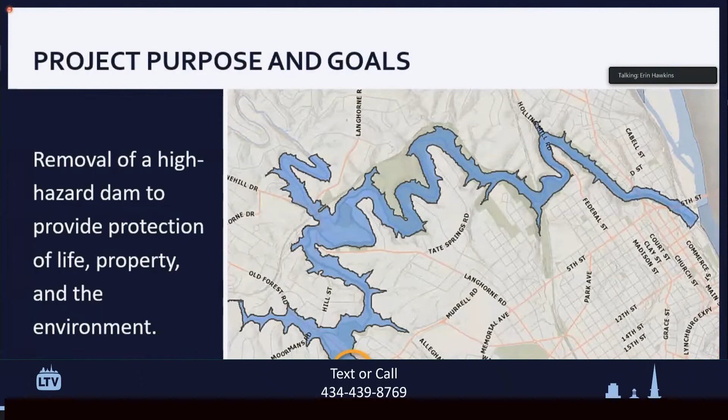So again, just to reiterate, some of the goals that we had mutually with the university: removing the dam on Blackwater Creek, managing that historical amount of sediment that is behind the dam, and then also using the remaining funding that we have to restore Blackwater Creek, what used to be a creek through this corridor, and trying to also create a wetland opportunity on either side of what this floodplain is going to be.

Wetlands are very critical to stream ecosystems, able to help provide habitat, provide ecodiversity, and also help with some of those overbank floods that we'll have through this area, since this is an area within the floodplain.

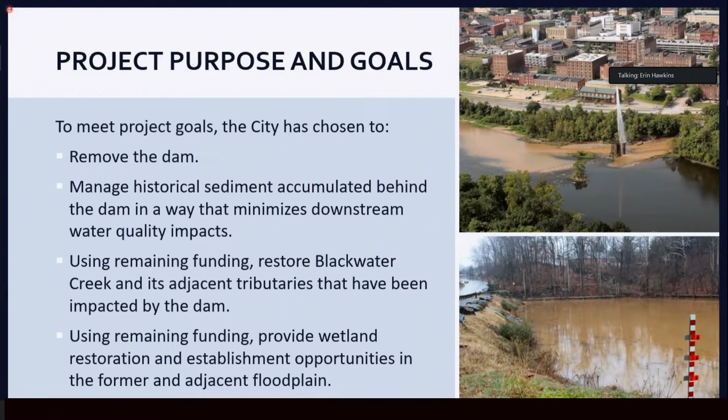So going over some of the work that's been completed so far, there really has been a considerable amount of work completed to date. This has included a historic evaluation of all the documentation that we've had on this project. As Tim mentioned before, this has been a highly studied lake and will continue to hopefully be an area of interest and study for years to come as this changes from a lake system back to a riverine area.

We have done a detailed topographic survey of the project area, including detailed wetland delineations. So these are those areas along our creeks that have those wet characteristics along the whole project area.

We've done a significant amount of geotechnical and seismic refraction work to understand the inner workings of the dam itself, including the bedrock conditions, laying the foundation for this project to come to life.

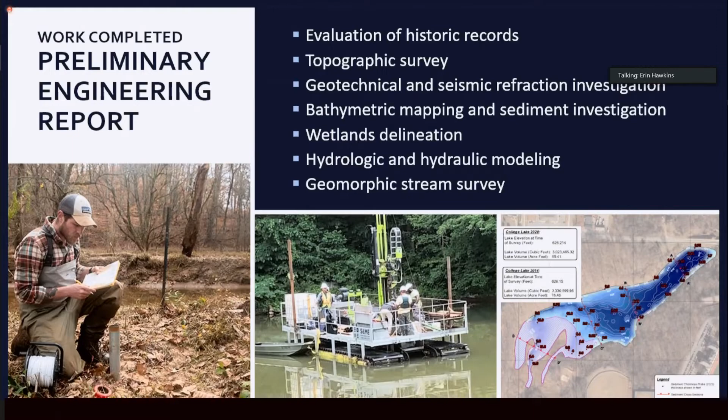One of the things we really wanted to take advantage of is looking at what the future could hold. Once construction is complete and this area has had time to stabilize and reestablish itself as a riverine system, there's a tremendous opportunity for recreational and educational opportunities. We've worked closely with our partner departments, community development, and parks and recreation.

We've also worked closely with the University of Lynchburg and Lynchburg City Schools, particularly the science administrators, to understand what needs there could be for local school children to maybe one day come out to this as an outdoor opportunity right in their own backyard.

Looking at future trails, trail extensions, educational signage and opportunities was really important for us at this point, so we can work through our permitting process and account for these future amenities now, so they're not a roadblock later when we want to make trail improvements to this restored area. This master plan can be used as funding is identified in the future for implementation—a very exciting opportunity that could come out of this process.

So I want to go over quickly a few of the existing conditions before we dive into the real heart of what we're here to talk about tonight, because this lake and this watershed posed a certain set of challenges for us to be able to get to this point of the design.

College Lake watershed has a fairly significant contributing drainage area, about 22 square miles, over 14,000 acres that drain down to College Lake. The outline on screen shows that watershed, reaching almost down to and including a portion of the airport on the southern end of the city near 29. It extends all the way over towards Tomahawk Creek, towards Enterprise Drive, and along the 460 corridor near Liberty University. So there's a fairly significant area that drains down to this lake.

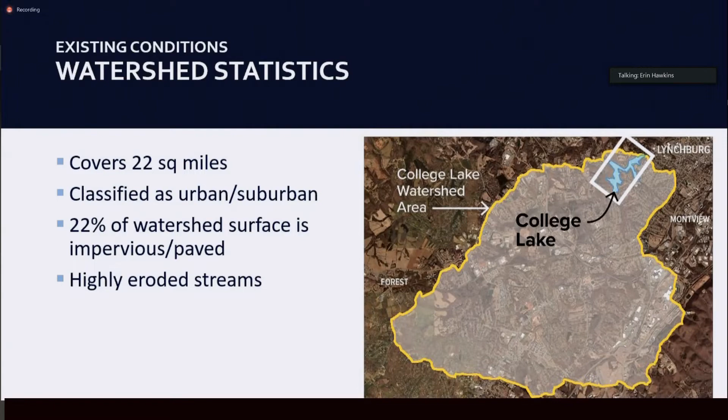What you'll see here on the screen is the lake area, shown as the previous extent of the lake. As we get ready to look at this, we can see the changes that this lake has gone through over time.

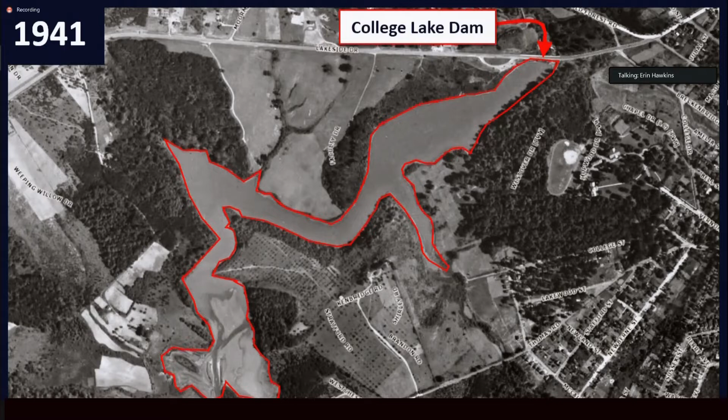This is aerial imagery that we have available, showing the historic extent of the lake. As Tim mentioned before, when the lake was initially built, it covered approximately 44 acres of surface area. This picture was taken in the early 1940s, not even a decade after the construction of the lake itself.

This is an aerial image from 2019 imagery that the city has, and what we have outlined in red is some of that historic extent. From that 1941 image to the 2019 image, and even more recent ones, you can see the intrusion of sediment into the area, and you can see how that lake area has really been reclaimed by a forested area. Within that, it poses a certain amount of challenges, and we'll go through those here really quickly.

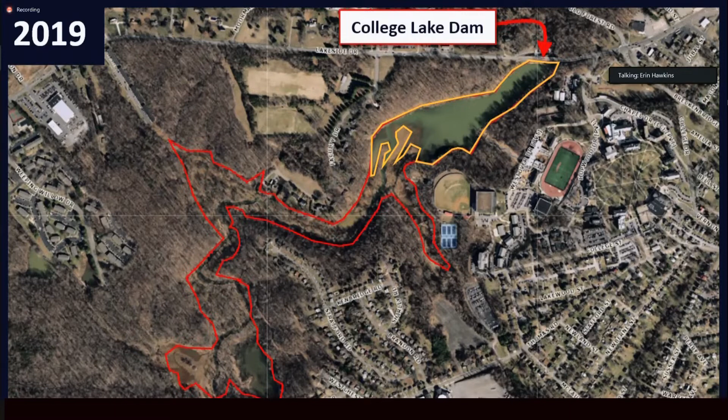College Lake Dam is what impounds College Lake. It is an earthen dam, as Tim mentioned. The spillway at Lakeside Drive Bridge, as it is today—if you can imagine what it would be built today—the spillway would essentially need to be at least the full length of the dam, just to be able to pass that probable maximum flood, or that 10,000-year storm event that was mentioned before. So really looking at that structure, where it was situated, and the bedrock situation was very critical in determining a stream alignment through this area.

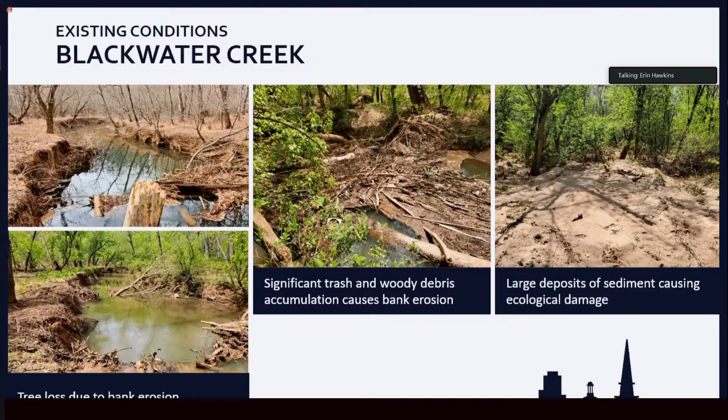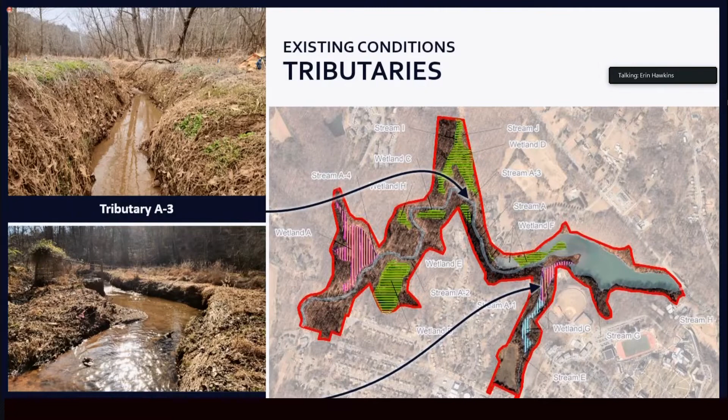I wanted to show you where those tributaries are in relation to the project area. Next slide please. These are two other smaller tributaries that mostly drain the university itself within the project area, so being able to address and account for that drainage into the project area will be important as we move forward.

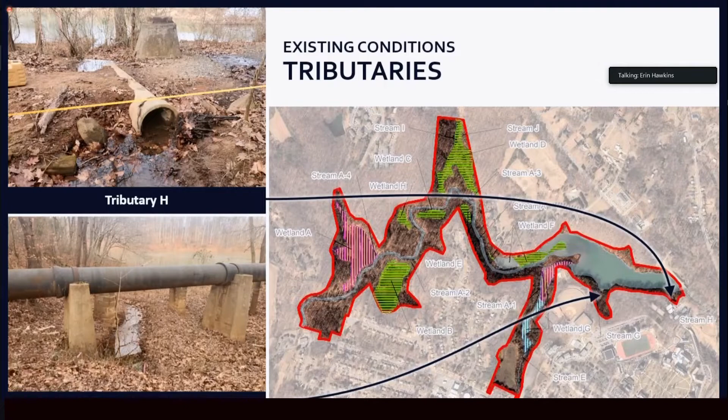Next slide please. Now I'll turn it over to Troy Naperala with AECOM to go through the proposed conditions and construction considerations. Yeah, thanks Erin.

So my name is Troy Naperala. I'm a senior technical advisor with the project, and I've been involved on a fair number of these types of projects across the country. So I'm really happy to be here today to talk to you about this project.

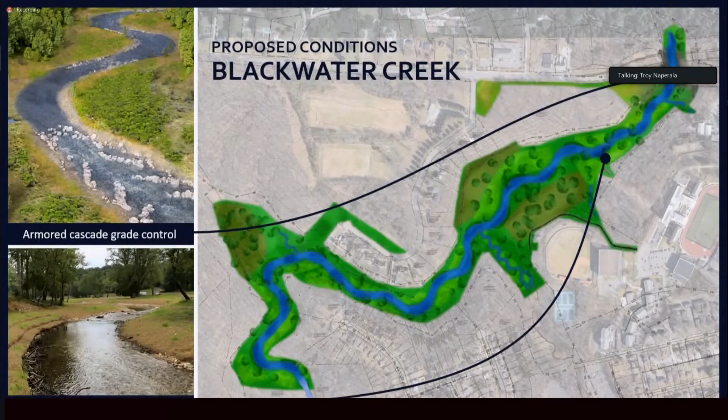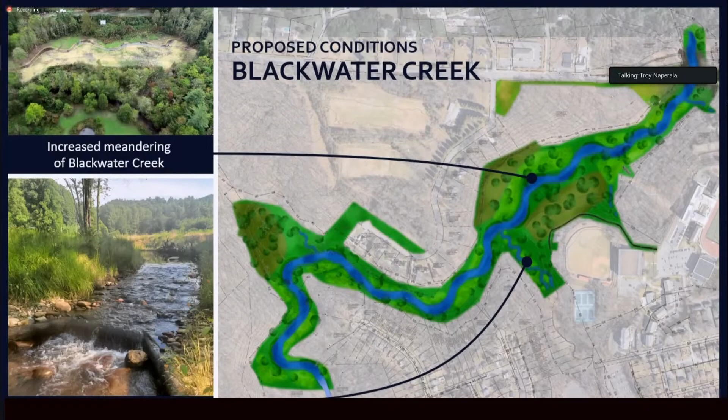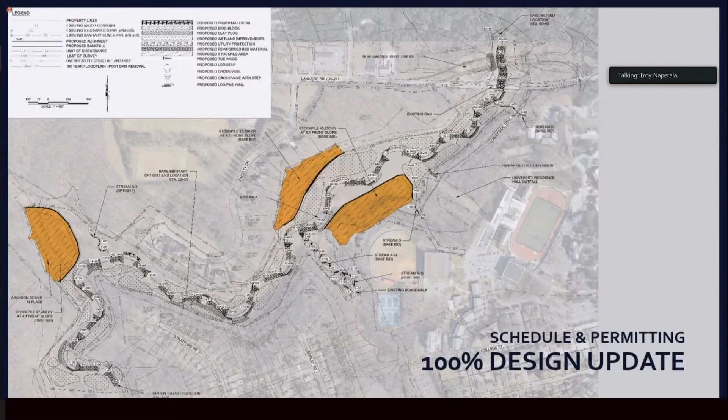To reduce costs and get that material out of the stream so it doesn't flow down as we remove the dam, we've identified 3 storage areas that will be permanent locations where this material will be removed. These 3 locations have sufficient capacity to hold all of the sediment we'll have to manage as part of this process. It's outside of the floodplain, and it'll be contoured into the natural topography of the area, then planted with natural vegetation. Go on to the next slide.

When you get to construction, it's a big site with a lot of activity going on, so there will be a fair amount of signage. This is really to protect the public and keep them out of the way of the construction crew. During construction, the Creekside Trail will be closed from Lakeside Drive to Shirley Road. This signage will be up for the duration of the project, and we'll do this in close coordination with Parks and Recreation and the University of Lynchburg.

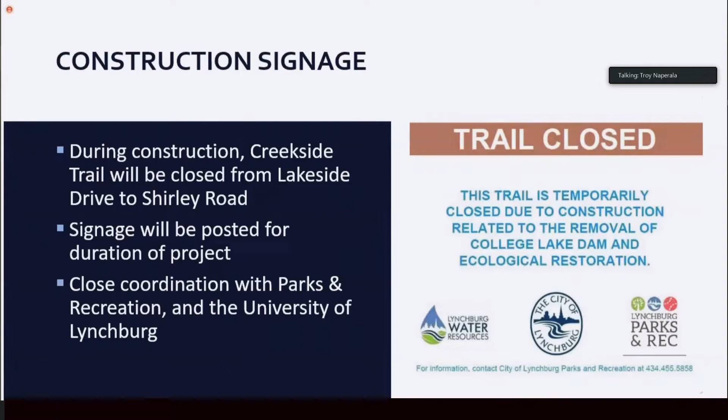We have to manage the water, take care of the dewatering process as we lower the dam. For this particular project, we've selected to use siphons to aid in the management of that water. We've used siphons on a number of projects - they're a very useful tool available to us for a couple of reasons. One, it gives the contractor a lot of control over how much water we're moving from the impoundment downstream, which helps as they move equipment around and remove sediment and dispose of it on site. It's also helpful environmentally to control the sediment and turbidity going downstream, compared to some other methods. So we'll use that to manage the flow and, by default, the turbidity, giving us the opportunity to control dewatering at a slow rate to keep everybody safe and manage the water on site.

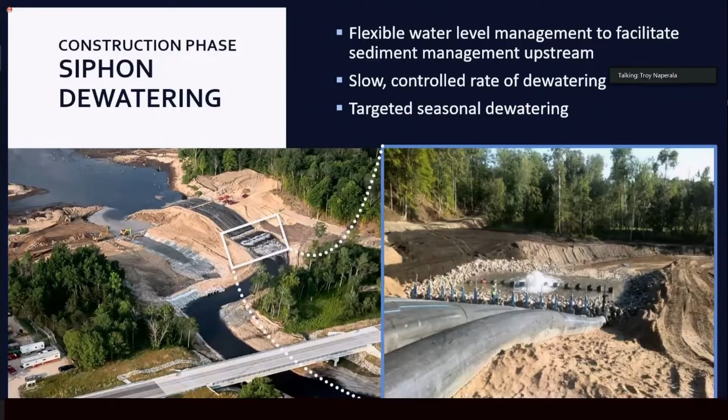So, more about sediment management. We'll use a number of methods to manage sediment on site. There'll be active management as the water level goes down - the contractor will go in with excavators and move that material out of the floodplain to those permanent sediment disposal locations. We'll also employ some other options as well.

On the left, we're showing sediment traps. We'll construct these throughout the project in various locations. This is an example of a pretty simple but effective approach where you put in a series of bulk bags - it's a very small dam that backs up water, slows the velocity, and allows particles to settle out, then it can be excavated from that area. In the same photo, you can see the arm of an aquatic, pontoon-based excavator. We've seen these on sites as well - they can get out on some pretty soft ground, excavate that material, and move it to more stable ground to get it to the final disposal sites.

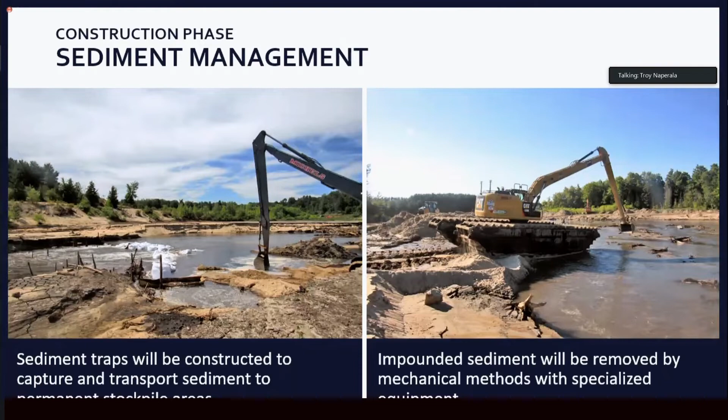Going back to this, the right-hand photo just shows that excavator in more detail - it can get out and move material.

This slide talks about the sediment stockpiles. As I mentioned, there are three of them on site, but we don't leave them unprotected. Those sites will be contoured to blend in with the surrounding topography to protect against near-term erosion. They'll have a series of coir logs placed to help with rill and gully erosion, fabric placed over them, and some quick-growing crops to stabilize it for the immediate period right after construction. Then it'll be planted with natural vegetation that will take root over a longer time frame and hold that material in place. The three stockpiles will handle approximately 150,000 cubic yards, which is everything we need to store on site.

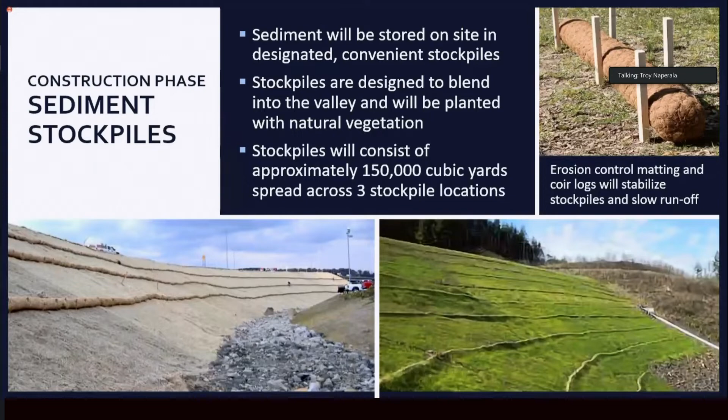It's always important to manage expectations during these projects. It's important to know that it is a large construction project, just like a highway or a home development. There's a period where we have exposed soil and water can get turbid, so we like to talk about what to expect and how we manage the site.

I'm going to start at the bottom and work my way up. We're working in the river - there are periods where we're digging in flowing water that can create turbidity. We do everything we can in our plans and specs to limit the amount of turbidity in the stream. It's generally part of the permitting and in our specs, so we work closely with the contractor to limit that, but it does happen occasionally.

The second thing, working my way up, is an unattractive view. Initially, as we draw the pond down and expose some of the area, there'll be a lot of area that's not vegetated. We try to minimize that, but eventually we'll get the site relieved of water, and we'll be doing work, and it'll be a fairly large construction site.

Construction noise, that will occur. There will be equipment on site. It's loud. This will be limited, obviously, to the requirements of the city for that construction period.

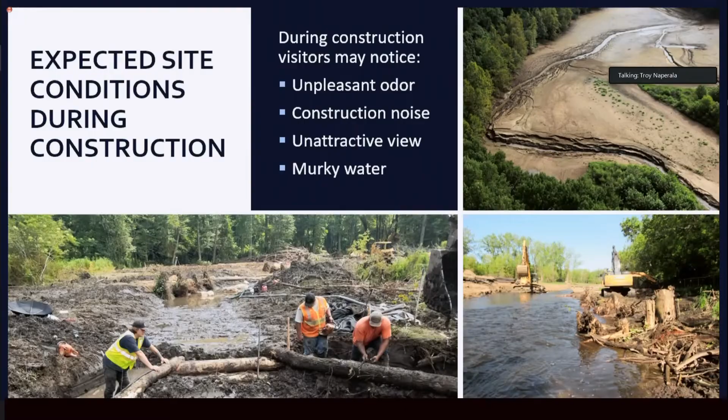When we talk about the construction phase, another tool we have in our toolbox as engineers is monitoring and construction oversight. Right now we've put in some turbidity and dissolved oxygen monitors so we can look at pre-construction data and see what the river looks like. That will stay in place during the course of construction, and we'll monitor that.

So if those turbidity or dissolved oxygen levels get outside of a normal range, we can call a timeout, take a pause, talk to the contractor, and try to understand if something being done on site is contributing to those numbers, and then take corrective action. So that's a tool we have at our disposal.

We'll also have engineers that specialize in this type of work on site during construction to monitor the activities and work with the contractor to help them implement the designs as we envision them. That concludes my piece of the presentation. I'm turning it back over to Aaron now. So thank you, everybody.

I really appreciate that overview. Next, we're going to move into the long-term management, and then get into some of the permitting and scheduling pieces of this.

Once all of this work is said and done, what the city will be moving forward with is the post-construction management, or the compliance monitoring period. This is a requirement of our permits through the Army Corps of Engineers and the Department of Environmental Quality. All this is also done through the VMRC, the Virginia Marine Resources Commission, so multiple agencies will be working with them to secure the permitting for this project.

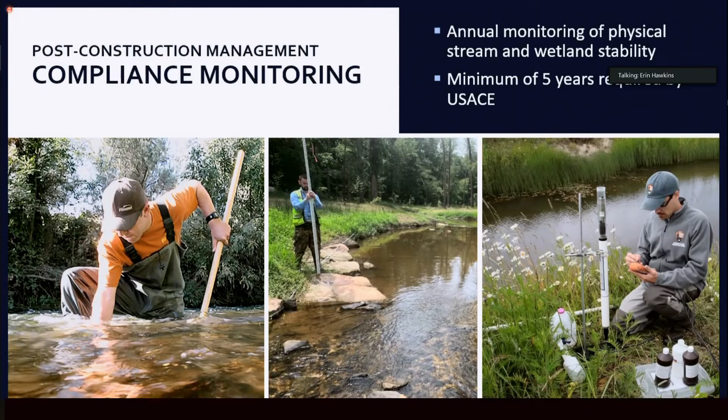Post-construction, once all the equipment is gone, along with AECOM, we'll be keeping a very close eye on this project site, making sure the site is stabilizing, the vegetation is coming in, and the project remains successful. Really and truly, that is our only long-term goal - making sure not only that we get the dam gone, but that this is a successful project moving forward.

Another aspect of this is the long-term management. As a primary and major landholder of this project, we'll be working with the University of Lynchburg in setting up what that long-term management strategy can be.

This will really be for the long-term post-construction. This can be everything from annual inspections, just walking through the site to see how it's coming along, to also looking at invasive species. There's no surprise that native species are the preferred choice of plant in any of our project areas when we're trying to implement stabilization practices.

But those invasive species are well abundant in this project area. So it's not the expectation that invasive species are completely eradicated from the project, but rather that we're able to manage the invasive species enough to allow some of that native planting to come through and thrive within the project area.

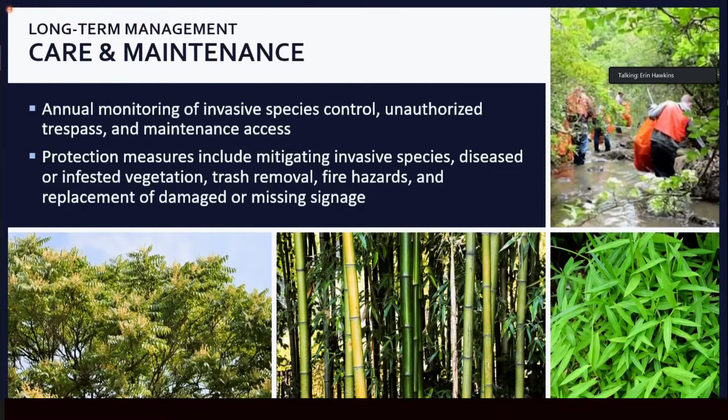What we hope for the university, and others as well, is that there could be research opportunities, whether university-led or grant-funded, to have that research in their backyard, partnering with Lynchburg City Schools through recreational and educational opportunities we identified. This could be a really great outdoor classroom as those opportunities come to light, along with community engagement pieces like volunteer trash cleanup events.

The picture you'll see is actually some of Dr. Laura Henry-Stone's students who came out and helped us evaluate one of the tributaries in the area, over off the end of Faculty Drive, working with our technical lead, Brandon Alderman. He unfortunately couldn't be with us tonight, but he's been a driving force behind this project, getting it to the stage we're at today, so I want to acknowledge him at this meeting.

There are a lot of opportunities. The city remains committed to staying engaged for whatever the future may hold, whether with university students, Lynchburg City Schools, or other opportunities as they arise. So we're really excited about what could be.

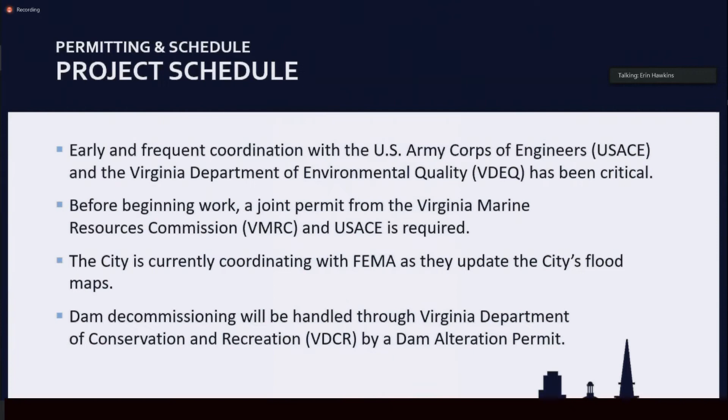So with that, here's our schedule. We've been working through and completing the design process, and we're in the permitting process right now. We'll be moving forward with securing easements, both with the university and other surrounding property owners, before we go to bid later this year. Hopefully by towards the summertime, end of summer, we'll be out to bid, getting this project ready. It's our hope to have construction beginning in winter of 2023.

By January 2023 is our target to have construction started. This is really important because December to May, or December to March, is an ideal time to remove the dam. We're not seeing the large storm events we would normally have. It's not out of the realm of possibilities, but the likelihood is really low. It's just an ideal window to get in, and that dam removal will happen very early in this process. So by spring of 2023, the dam will be gone, and then the focus will be on getting the restoration efforts completed.

Construction as a whole will be approximately 2 years, so calendar year 2023 into 2024, this project will wrap up in the winter of 2024. And that is as long as Mother Nature cooperates with us as we move forward.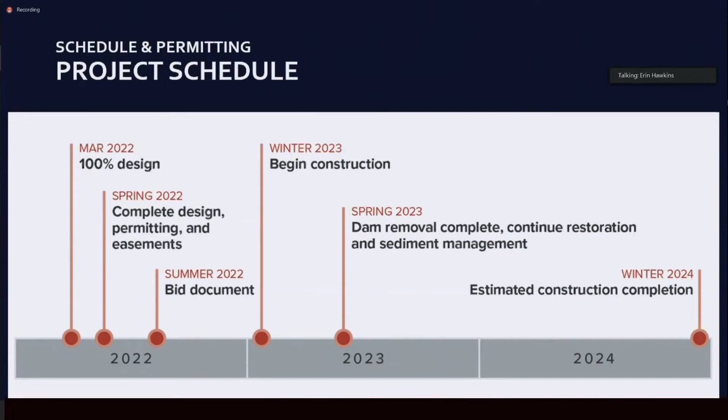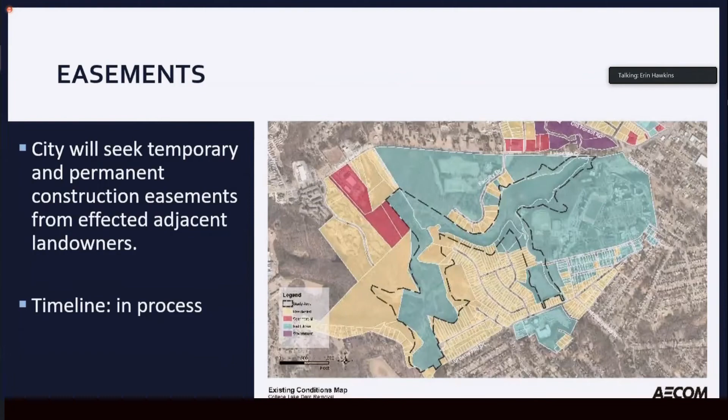And so I believe that really wraps up our presentation tonight. We are really glad that you've been able to join us, and we'll be happy to answer any questions you have in our time remaining. So thank you all very much.